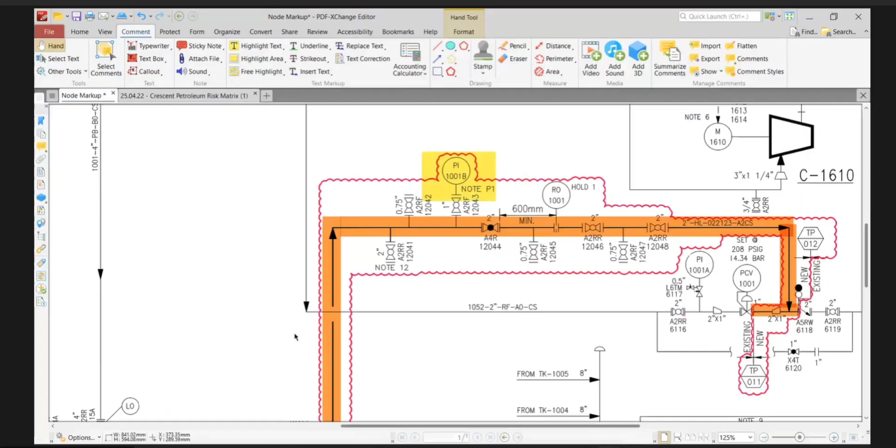Good guys, so I think for no flow, any other reason for no flow?

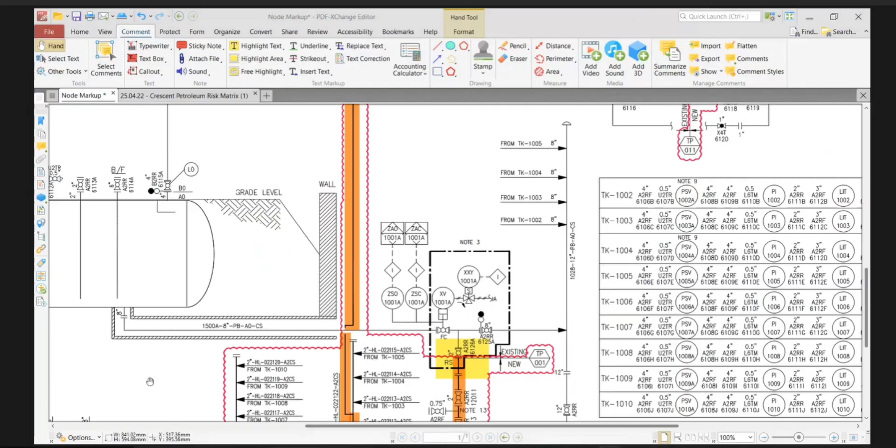Okay, so after this no flow, I would go for high flow, because there is a high flow possibility due to the high pressure of nitrogen or high liquid level.

So Kedar, how we can ensure that there is a no flow, and what is the causes of no flow? No flow or high flow? More flow, yeah.

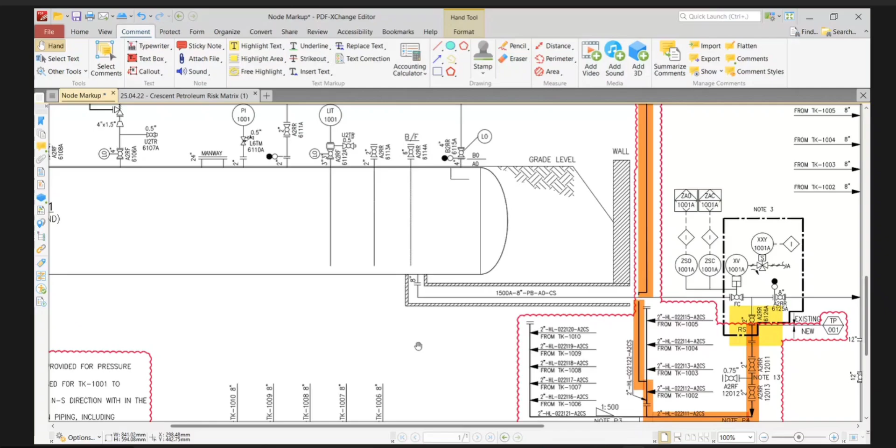Actually, what happened, once we have this RO, the flow through the RO has a maximum limitation that will go to the flare. So whatever we can say as a size, this RO is a safeguard.

Don't go for this. I would say that more flow is possible if the nitrogen pressure is more than 200 psig. So there is a possibility of more flow. This is only one cause for more flow.

Other valves are full bore open. There is no possibility. If, say for example, during purging or during depressurization, the operation team has to increase the pressure to 200 psi.

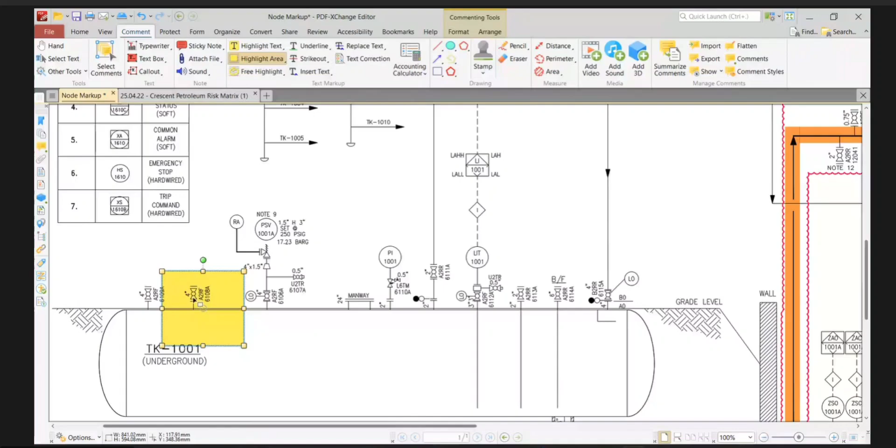If in case this nitrogen valve PRV fails and nitrogen goes more than 200 psi, that means there is more flow through the system. Am I right? Yeah, it depends on how much they are providing.

That's what I understood from the operation. They are going to pressurize the nitrogen at 200 psi, but the flow for that varies from 1000 to 3000 to like 5000 SCFS. It depends on how much time you want to take to depressurize that vessel. All these activities depend on that operation.

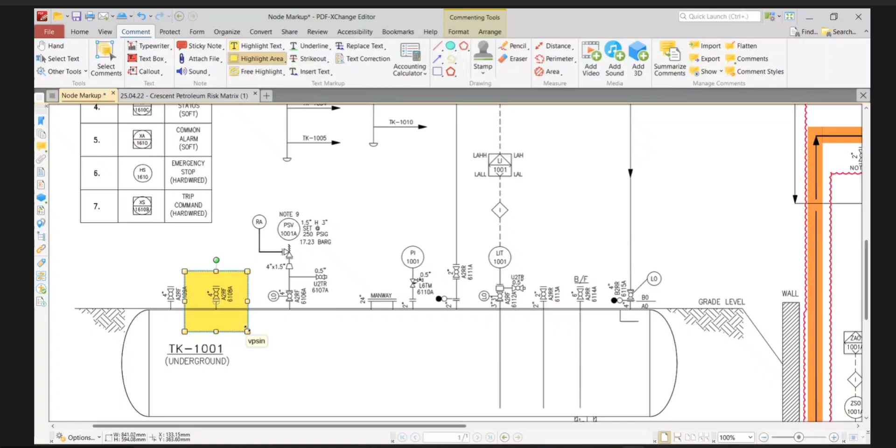Mr. Kumar, worst case scenario, I have to consider that more pressure of nitrogen can create more flow. Kumarsan, what is your opinion?

Actually, we do not expect high pressure on this bullet because our PSV set point is 250. Yeah, this is a safeguard, so I mentioned that. So we always maintain pressure lower than that. At 200 pressure, normally we maintain 200 psi.

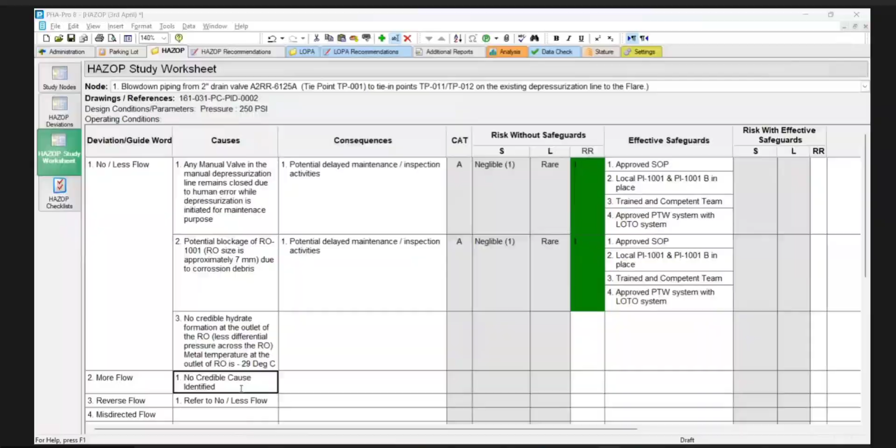And if you open the valves and flow through the 7 mm RO, then whatever the flow is, it's maxed by the orifice. And what's normally the highest pressure from our nitrogen source, because that's the highest we can get?

The nitrogen source is different. We are pumping whatever we need, but we have the limitation of not more than 200 psi. Even if you are pumping more than 200 psi, then we have the safeguard of the PSV.

No, that is actually, Kumarsan, I agree with you, PSV and RO are safeguards. But first let us find out the cause. So the cause I am saying is there is a possibility of high nitrogen pressure. If you agree with me, then we can take that as the cause. Then we can say PSV is there, RO is there, that is the safeguard. So first we need to find out the cause.

Cause, I think the cause is there. Where's the more flow? Where's the more flow coming from? Is this more flow linked to that pressure? More flow, where is it? Where's the flow going? It's governed by the orifice. So where are we seeing this?